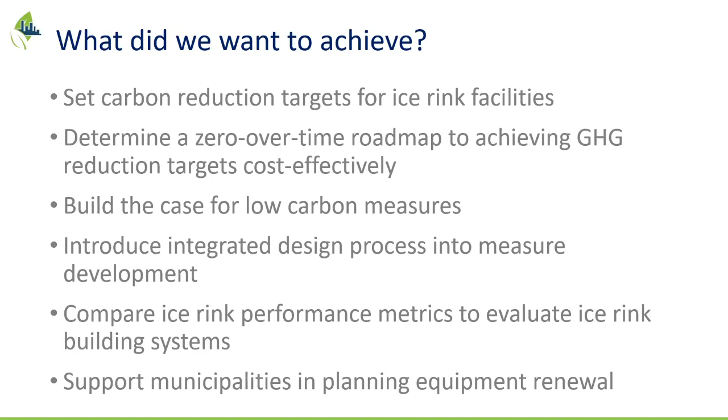And that work is ongoing as we keep moving along. And we wanted to support all of you who really were asking for help in bringing your asset management group into the planning process. So it's great to follow behind Adam and everybody else who's already done presentations, because this is kind of the backdrop to that. This was a few years ago.

So this will be familiar to any of you who've done a decarbonization study, especially if you're using FCM funding. There's data collection, site visits, a measure review, which we do collectively with the facility group, and then integrated design workshops, one with the whole facility team and all the experts, and then another with capital, where we do them sometimes together. Capital review workshops where we really look finally at what we decide and how that's actually going to get implemented. The purpose of that is, as many of you have talked about, getting your internal teams on side.

One of the things we found through the process is how capital doesn't talk to operations. It seems so logical, but it's that schism. And we talk about these really simple barriers. It seems very obvious that they should work together, but it doesn't happen. And the larger the municipality, the more disparate those processes seem to be. So getting everybody into the room seemed like a key opportunity to have that conversation.

And then we had final reports. At any time, if anyone wants to jump in with experiences or thoughts on how this worked out, would appreciate it.

So our overall finding, which seems quite obvious now, but we were able to prove that net zero carbon emissions is achievable and financially feasible in rinks, especially if you do it over time. It needs an all-encompassing evaluation. You have to look at the interrelationship of measures, how they work together. Life cycle costing is key.

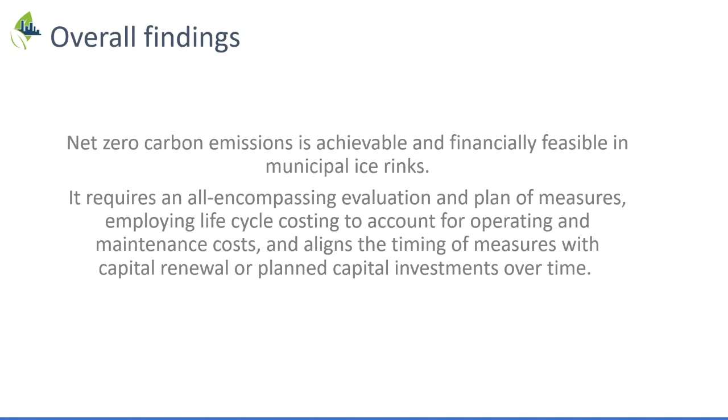Okay, so these are the hard numbers. But Kathryn's here because she can speak to them in detail. This was the size of the ice rinks and the pads, gross floor area, number of pads, months of ice in, number of refrigeration plants, et cetera. It just gives you a great sense of how totally different these ice rinks were. We had fairly new ones, we had ones that were almost 100 years old, we had everything in between, which is reality. That's what you guys face all the time—brand new fantastic ones and ones that have been around forever, and how you're going to manage that.

One interesting thing I'll interject here that I only found out recently is that a number of ice rinks already have heat recovery because they've purchased EcoChill or other similar refrigeration units, but it's not turned on and not being used. One of the big ahas for us out of this is how much operational savings can still be done immediately. Some of you already know that, some of you are in the process of working through it, through your own commissioning or that sort of thing. But to me it was like, wow, we have the technology already installed and it's not turned on. It's incredible. Those numbers are crazy—like 30% of the installed units across Canada have heat recovery and they're not using it. It was never considered.

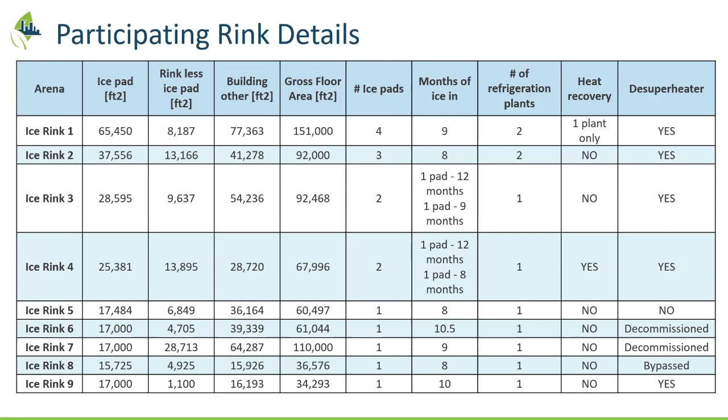Why would they not turn it on? Great question, I think we're just at the beginning of understanding that. Apparently it has to do with additional funding required for the heat recovery to be used elsewhere in the building. So you run out of funding—it's in the refrigeration unit already, but it's never actually used for heat recovery because you just ran out of budget. You need to install the next piece of equipment to actually use it, and that never happened. In the original design you think, oh, we're going to do heat recovery, but maybe it was just never envisioned—they come with heat recovery in them already. That's fascinating to me too. It's crazy, it's incredible.

Just for context, setting in your own net zero plans, it's interesting to see where they are now and then where they're going to end up. This was really hard to see, but this is kind of where the EUIs were when we did the study, and then the target EUI, that's the range. As you can see, that's quite a big range in terms of efficiency, or how much energy is being used on a square foot basis, and the split between electricity and gas.

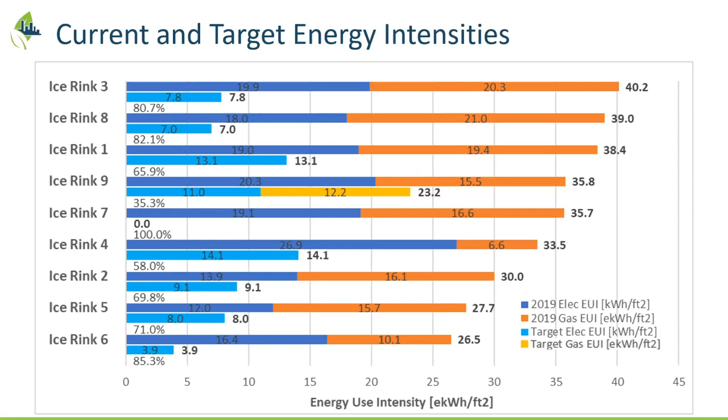This is the range, looking at the same target greenhouse gas emissions, going from what they are today, or what they were when we did the study, to the target greenhouse gas emissions at the end of the study.

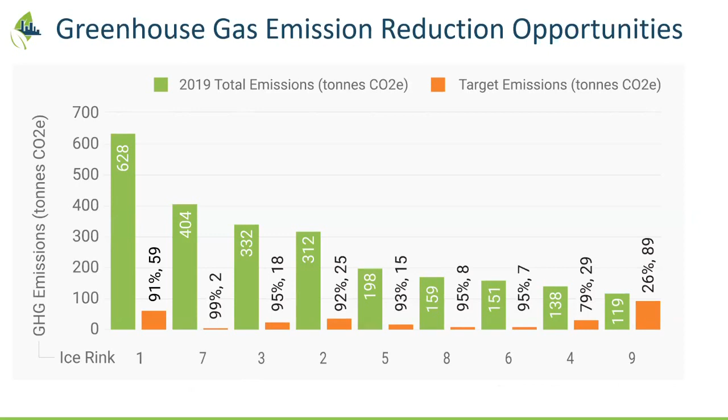We've been doing this for a long time: comparing system metrics. We often find, especially if you're deeply embedded in operations, that systems are over-designed to begin with. Here we're looking at the compressor, so obviously Rink 1 has a lot more compressor power than Rink 5 on a square foot basis. This is comparable, and the question is how much do you really need, because engineers do tend to over-design. Our shop is full of engineers, and they know that unless you push, you get over-design just because you're worried about capacity and designing for the worst case scenario. Engineers love to design for the worst case scenario.

Yes, please, sorry, just a question on that. With that metric, did you also consider how many months a year they build ice? Because that could be a factor in the compressor power per square foot. I think this is from nameplate data, so it might be, you're right, but it's a good question. I'll take the note and remember to get back to you on that one, because I don't have that technical information, but I'll ask about that.

If anyone's more interested in how we did that, we'd be glad to get our technical folks on it. We find this super useful, because when you're designing new, you don't want to be at the top of that list, you want to be down, you want the most efficient possible setup. You want the best pumping power per square foot, the lowest watts per square foot, because that's going to come into play when we talk about upgrading our electrical systems, since you'll need a lot more electricity.

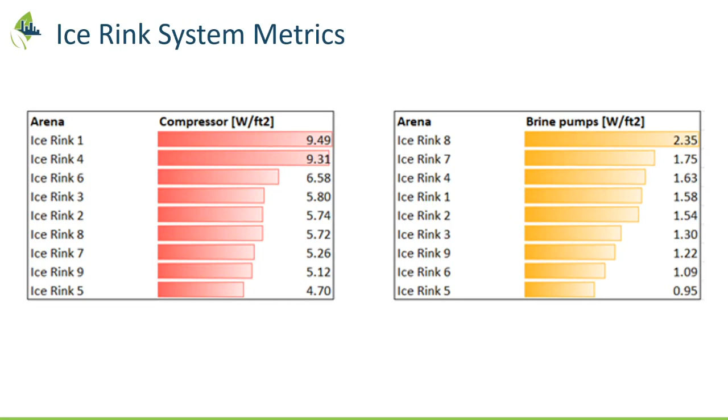We did the same analysis with dehumidifiers and lighting. I was shocked with the lighting. Here we are in 2023, and there's a ton of opportunity in Rink 3, because that's really high watts per square foot. Sometimes you have to go back to basics — when people do lighting retrofits, they just do like-for-like, but when you're looking at LEDs, you really have to redesign, because LEDs don't function like T8s if you're taking them out. It's an obvious statement, but you can see the difference in watts per square foot.

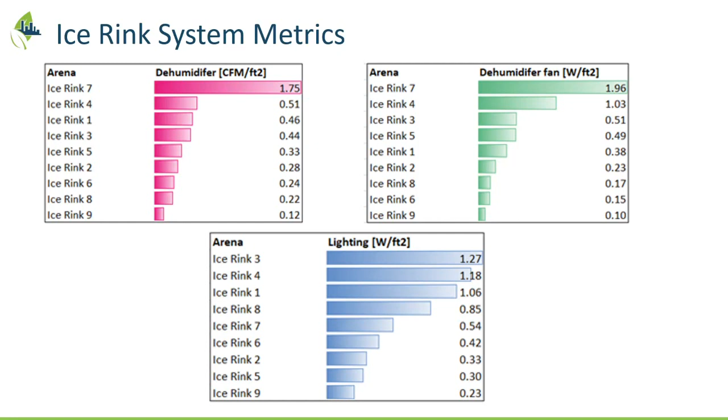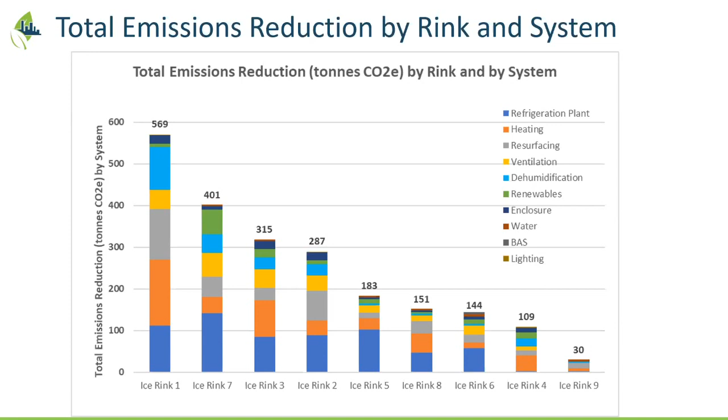And overall, this is where the emission savings were to be found. Not surprisingly, most of it's in the refrigeration plant and that upgrading, a bunch on the heating, 17% on the resurfacing. This was looking at cold water versus hot.

I think it's not a super difficult retrofit. I understand, more of a human issue, overcoming the way operators like to resurface their ice. When we talk about how you get people on board, that's a big one that we found. You needed people on board.

I think Caledon, if you want to pipe up, you were good. We use you as an example through many of our resurfacing conversations, because you've already done that. Yeah, well,

Maybe don't need the microphone here. I honestly don't have too much information on it, but I do know we struggle with our building operators using the REALice system. Pretty plain and simple from our perspective. I know they work, I'm pretty sure they use them for NHL ice rinks and stuff. So the science is there, the math is there to back it up, but they just like the way the ice is with hot water versus, I don't know. There are some technical aspects to it, like it needs to be a certain pressure for it to work properly. There are some complexities to it. But yeah, overall, we've definitely had some issues with building operators getting on board with the system for sure.

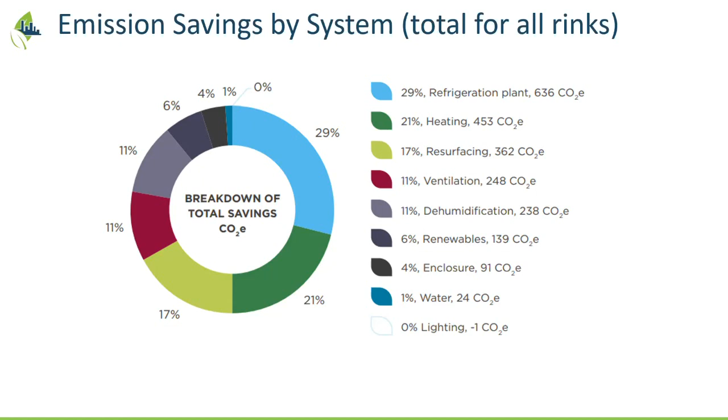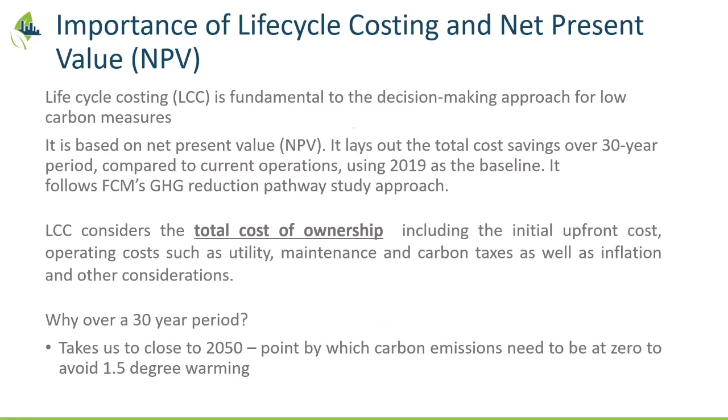We had a 30-year period that we looked at them over. It was taking us close to 2050, which were big goals at the time. When we started the pilot, a few people had climate emergencies, but not everybody, so we sort of used about 30 years. This is just a plug for life cycle costing - I won't delve into the details because I'm sure you've had many conversations about how to do life cycle costing and what goes into that.

So this was the aggregate of what we found, by measure. It's interesting to look at on a by-measure basis. One thing I'll say is these costs were in 2021, and some of our participants have already found these are out of date because costing has gone wild with COVID. We were looking at COVID-era costing, and even in that short period of time, these costs may already be slightly out of date. That's something we've mentally noted for our next pilot project - to look at costing and inflation and other pieces as well.

As you can see, that's the difference showing business as usual versus the low carbon approach with funding, because there was a whole bunch of funding available at the time - the green renewable federal funding, and then there's also the FCM funding as well. So what's the difference, what the business case looks like with funding, without funding, and then the overall savings and what measures you could find.

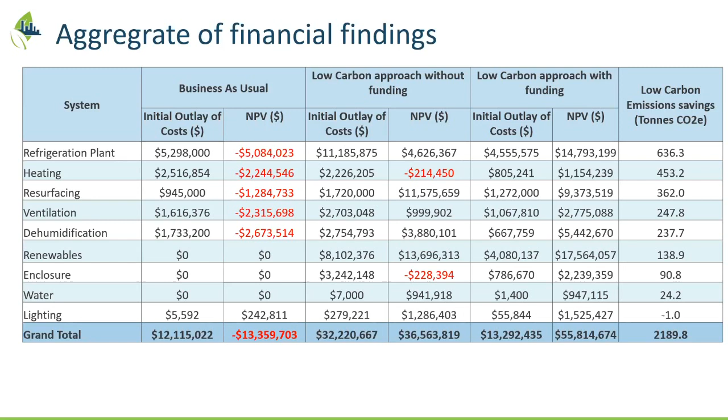This is illustrating the over-time approach - it's numbers, so the engineers did this one. I'd like to make it a bit more visual, but it shows you when the big implementation periods happen. Essentially a big 2023 implementation, because this was done in 2021, then 2024. So when you're implementing measures, the big cost outlays, and then how you slowly over time get to your low carbon goal with the projects. Any questions?

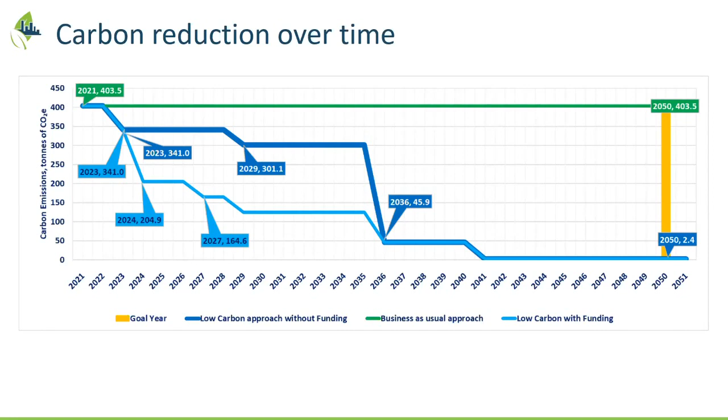The high impact measures that we found - specifically heat recovery came out on top. Adding heat recovery was the biggest, with 34% emissions reductions overall, so that piece was huge. Activating your heat recovery is another one, apparently, new to me. Replacing the gas boiler, ice resurfacing machines - a lot of this we've talked about. City of Burlington's presentation was great because it went into much more detail than I am. This is a high level overview.

Building automation system, another one I'm going to make a plug for - we found a lot of municipalities didn't have one that covered the whole building. This is a key component. There is funding through FCM - they give you a grant to take a first look at your energy management system, so you might use that to do a little addition piece there. Then we've got the cold water resurfacing, and then obviously PV - those are big measures.

While I'm here, I will say we looked really hard at geothermal. We did a lot of modeling and testing and could not make it work in an existing building with an ice rink. We just couldn't make it work. We did take a look at that. And out of curiosity, was the challenge again the huge amount of heat that would need to be stored somewhere that would imbalance the system?

Yeah, it's the system balance. Again, not the technical person, but definitely we worked very hard to try to make it work. And it's the balance in the system. Yeah, it's balance in the system.

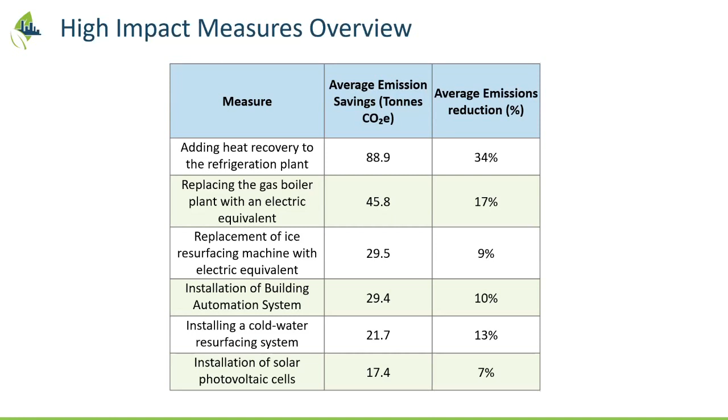So these are some of our early wins we found from operational savings. Optimizing ice temperatures based on activity level and occupancy, pretty obvious. Ice thickness - we found when we went in to do site visits that there was wide variation in what was actually being done. So following the standards that are out there is a good first step. Adjusting humidity, scheduling building systems, which again you need your BAS to do, lighting levels, and then reducing your water per flood.

There's sort of setting your internal standards - Adam talked to us once about setting your internal standards as a municipality and how you operate your buildings, because you set when you move from occupied to unoccupied, and if there's a scheduling shift. So there's a bit that you have to do, and then training your operators on what the protocol is - don't switch to manual or whatever the protocol is. So there's wide general training, and then there's specific training for that particular building.

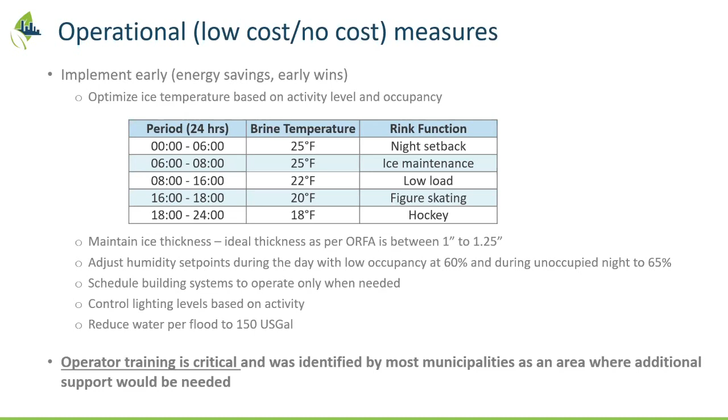Plug for BAS systems - not very much remote access. That's just, I'm speaking to the crowd here. Like, you know, all these problems, we're just telling you back - classic kind of consulting moment where we tell you your own problems. Different BAS systems in each building, none of them remotely controlled, not integrated. You got one that's embedded within the refrigeration system that doesn't talk to the other systems. So really having a strategy for your BAS system is everything.

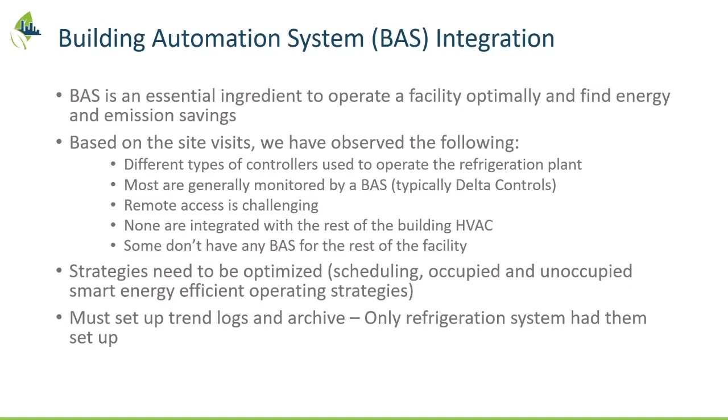Just reiterating that - there was the capability of capturing trends, this is a bit like the heat recovery. A lot of the refrigeration systems were able to capture trends and weren't, and no one was looking at them. So your building is giving you data, you can use it. Sometimes you don't have to add additional points on your BAS because it's there, you just have to capture it and use it. So on our plans, we often had implementing a BAS early, because that allows you to control what comes in after and what you've got right now.

Just to add on that, we've had two buildings, not in this cohort, that we've added building automation to. We initially did it over renewal because they were old, but after the savings we realized from the automation, we could have justified it on an energy management perspective. Those BAS's are between 300 and 400K, so you need a larger building, but if you have large buildings that do not have building automation, there's a business case from an energy perspective to install them. And you had really, really short payback, didn't you? Yeah, it was a couple of years.

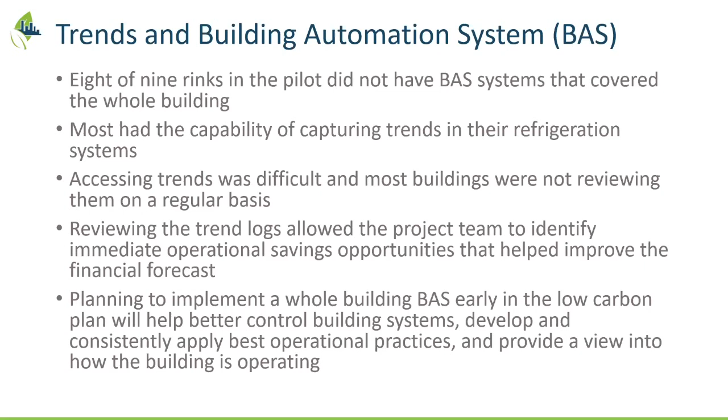It would take maybe 4 or 5 years for 70, 80K a year. So even if you're still operating under your 5-year payback model, yeah, a BAS can pay off.

Thanks. Yeah, so some of this, adding heat recovery—there was a huge piece around heat recovery, ice storage, and I think Janae can talk to battery storage. This idea of storage when you don't need it is going to come into play more and more as we go forward. Using VFDs, that's another piece, and optimizing of sequences. So there's a lot that can be done in these buildings even before you start capital retrofits, is what we found.

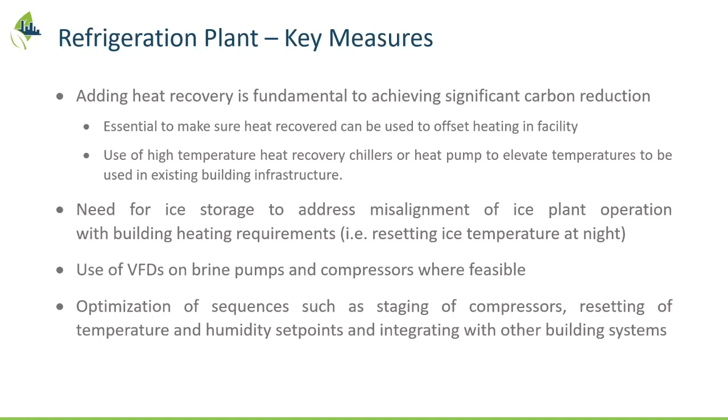Oh, okay. So I realized, sorry, I have all of the technical details in each of these slides so that you can take them away. I'm not going to go through them in detail, first of all, because I'm not the person who knows everything about this, but if you are interested, I'll just flick through them pretty quickly.

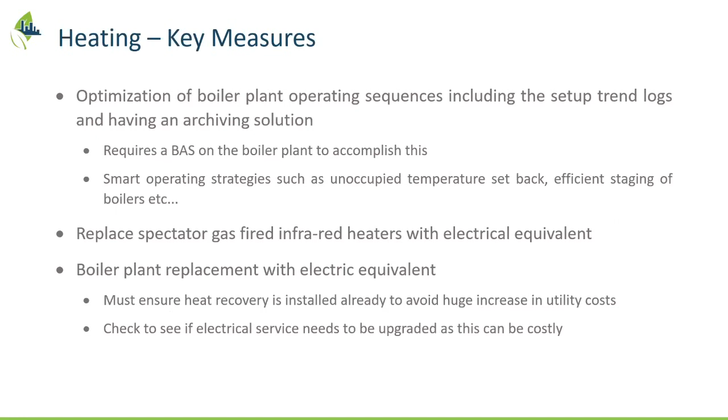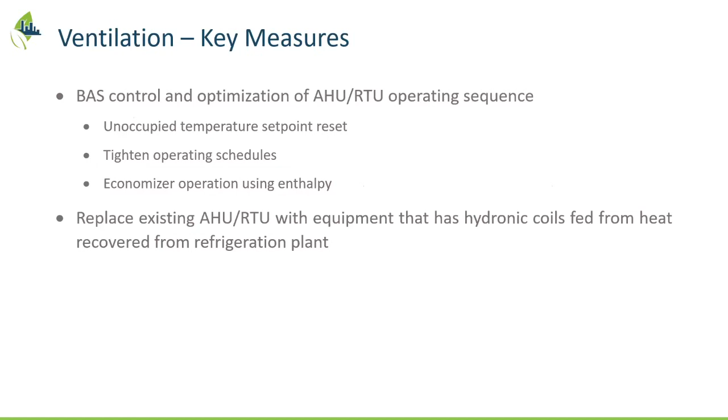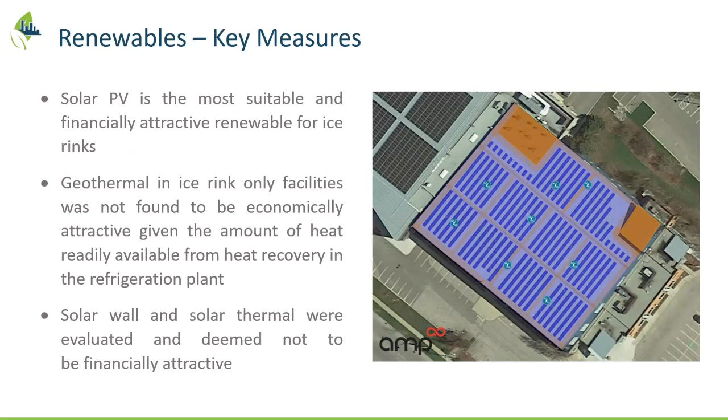Renewables, and this is a visualization of the renewables. This is a piece where we talk about how we looked at geothermal, solar wall, solar thermal, and none of those made sense economically.

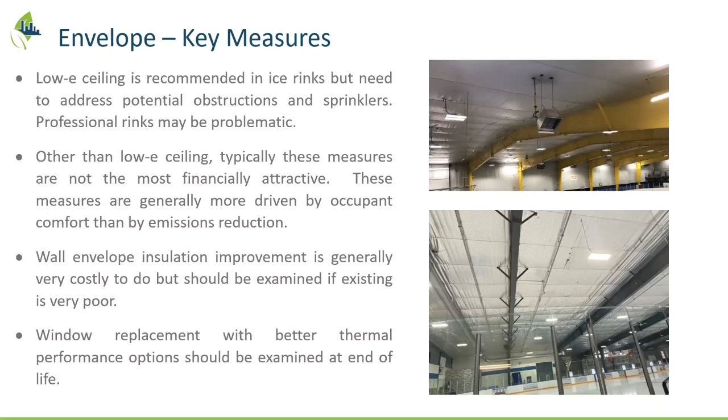Envelope, we looked at low-E ceilings in particular and wall envelope insulation, and not a lot made sense from an economic perspective, but we did it where we could. And then reducing the use of water and lighting controls.

So our lessons learned from this: getting organized early, gathering your building data. We spent a long period of time—if you've already started down this process, you know, we spent a lot of time just gathering data, drawings, documentation. Those things are missing for a lot of buildings, especially the older you get, the further away that was. We have funny stories like the key piece of the drawing has been ripped out to put someone's chewing gum in, or whatever—oh right, that's where the compressor is.

Getting everybody involved—everyone had presentations before me talking about this. It's so key because you're getting your whole organization, your whole municipality involved into the integrated design process. The life cycle costing—we did work with procurement and others to start introducing the idea of life cycle costing.

Operational, for the low cost, no cost measures, we put those first, and heat recovery, if that was available. The integration of the refrigeration plant with those systems, BAS, and then again, heat recovery.

I might just prove my ignorance on this one, but I was thinking about the heat recovery. For the heat recovery where it's used, where is the waste heat going? Is it going back into the building for the heating of the building? Yeah. Okay. And isn't it a lot more heat that you need than just for heating? Is there other—to maximize your heat recovery use, would you have to have a neighboring building to be able to take that waste heat? I was just curious, maybe that might be one of the reasons, or is all the waste heat able to be replacing electricity or fossil fuel heat in the arena?

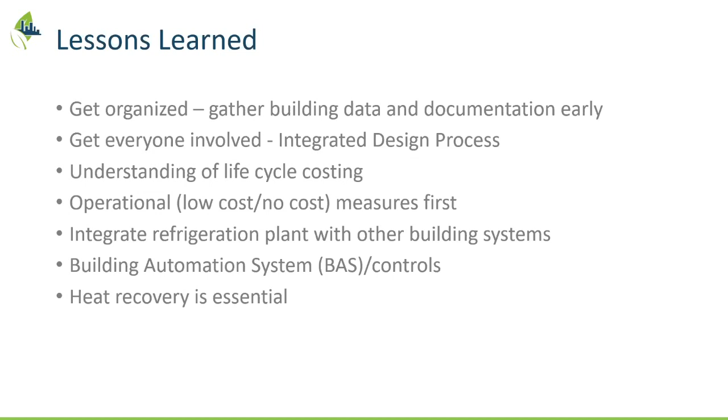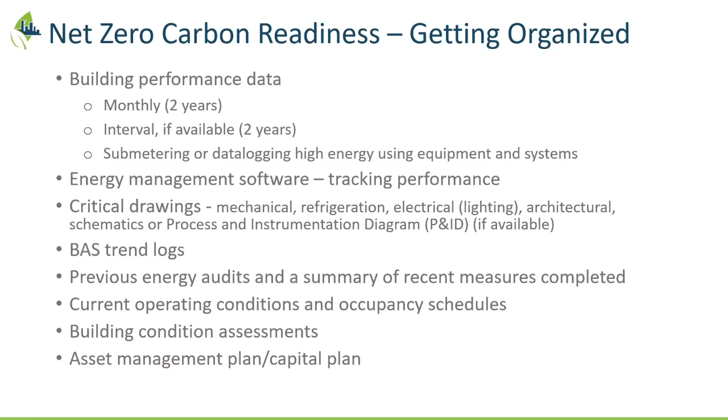Okay, this is some of the information we collected around getting organized. Everybody's at a different stage—many of you are well down this path, so perhaps this isn't as useful for you.

So what's next? As I mentioned, we have a cohort project for net zero ice and net zero swimming pools, so we're looking at that first. We also see some recommissioning activities already happening, since they were recommended in the study—a few of our ice rinks are actually moving forward with implementation.

I can speak to this one—it's happening at the Township of King, and they're already doing a recommissioning project with FCM funding. It was a pretty new facility, but even new facilities don't always get commissioned properly, so this was an opportunity to recommission and really look at how to bring their energy use way down, so the retrofits needed are small.